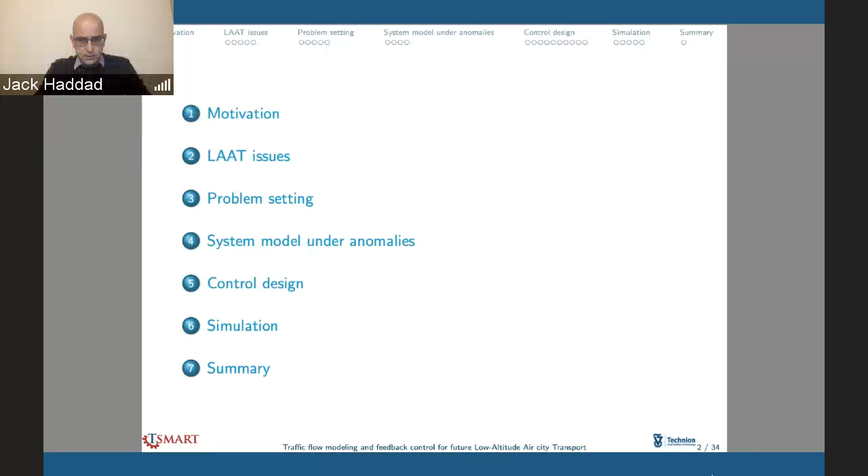So low altitude passenger and delivery aircraft are being developed as a new mode of urban transport. There are many companies involved in developing such vehicles, like Airbus and Volocopter in Europe, and Boeing, Uber, Tesla in the United States.

So the penetration of these low altitude passenger and delivery aircraft into the airspace cannot be prevented in the near future. We estimate something about 100,000 passenger drones that could be in service worldwide in 2050, and more, expecting more like millions of regular delivery drones in the airspace of cities in the future.

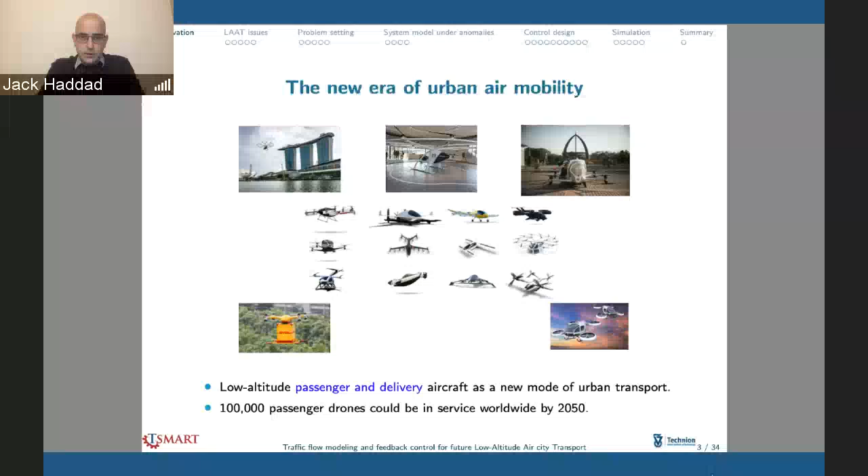So what will happen is this will give rise to a new urban air transport system, which we call LAAT, low altitude air transport systems. And similar to road transport systems, increasing the number of passenger and delivery aircraft will cause congestion. And once it causes congestion, it will also raise new air traffic control challenges.

Therefore, we think that we must first investigate the collective behavior of LAAT aircraft in cities and the ways of controlling LAAT systems. We believe that the MFD can facilitate and help in the modeling and control of large-scale LAAT.

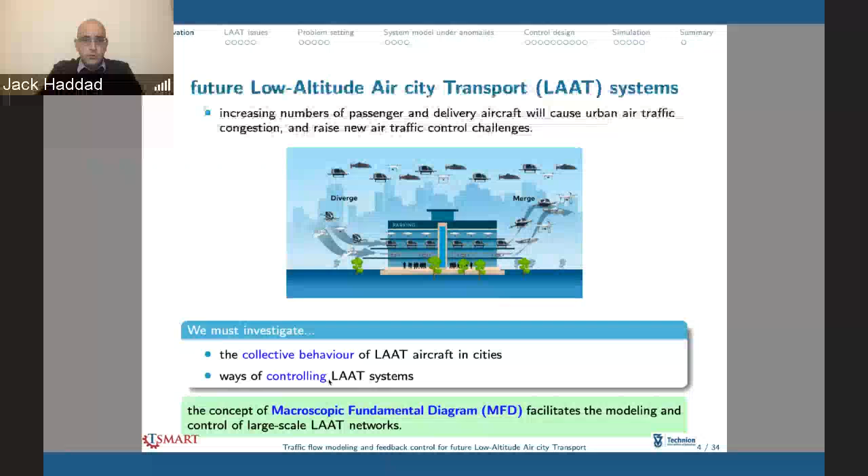So let's move to the LAAT issues that we need to handle. First, the current air transportation management schemes that exist are limited, and they are limited to conventional airplane operations. They cannot be used for LAAT systems.

They are based on centralized control structures, which means we have a human operator or controllers responsible to ensure the air traffic moves safely and efficiently without any collision. Such a control or management scheme implies rigid, individual trajectory-based operations with fixed routes, pre-planned or approved aircraft schedules, while ensuring conflict detection and resolution in the air.

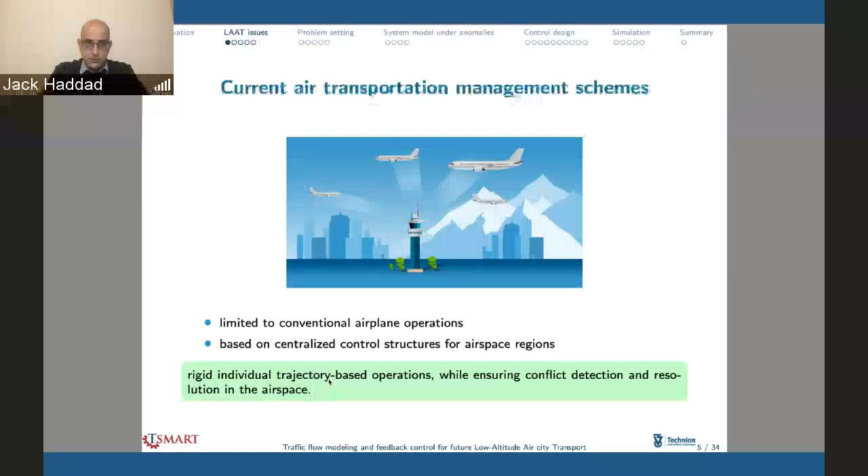Regarding the operation of the future system, in comparison with conventional airplanes, the operation of the future LAAT system is expected to be more flexible. For example, such a system will allow on-demand point-to-point urban travel or delivery with a higher total number of daily short trips, under a more complex urban environment with energy consumption constraints, in addition to noise and weather considerations that should be taken into account.

The LAAT aircraft are also expected to operate under congested traffic conditions. This happens because of the large number of passenger and delivery aircraft, and also because they will be traveling in a very limited allowed capacity.

In addition, we have a very unique dynamic property for the future aircraft, which is hovering. This is one of the key differences between drones and conventional aircraft. In congested regions, the hovering dynamics will introduce new interaction effects between aircraft, like a platoon of drones waiting to enter a parking area or any other building. So we need also to control such buildings.

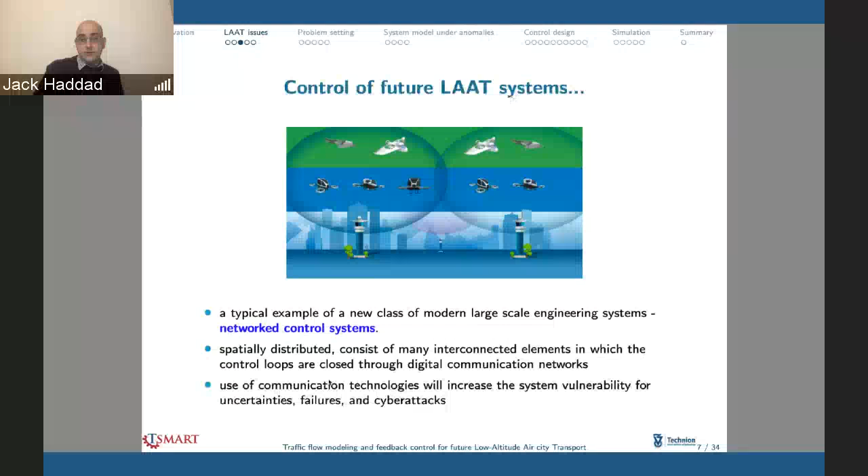My point here is that the large LAAT network should be robust to various anomalies in technical devices or network communication. This is a very crucial point, because first we will increase safety, and more importantly, increase community trust and acceptance of such systems in the future.

Given all these operation differences between conventional aircraft and LAAT aircraft, future aircraft cannot be managed by current aircraft management schemes, because they are not dedicated to this task. If we utilize such a scheme, this will decrease the traffic performance of the future LAAT system.

Therefore, inspired by urban road networks, we suggest addressing the future air congestion problem based on a new operational concept. So instead of looking at individual aircraft, flows of aircraft traffic should be controlled.

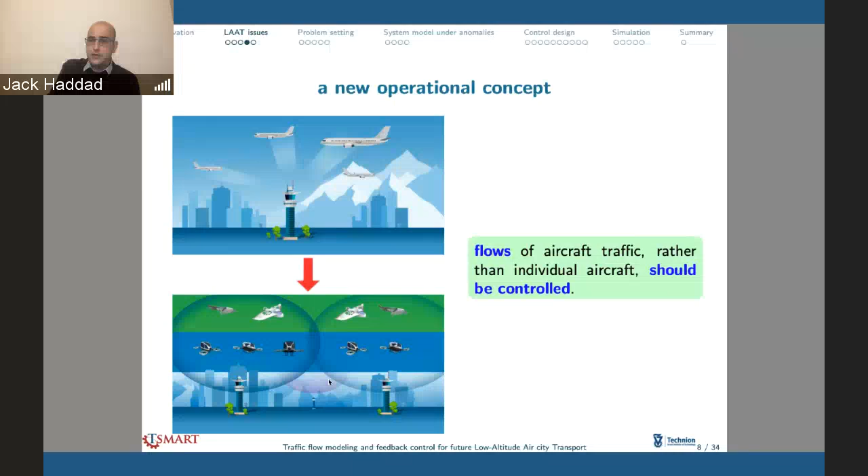So the solution approach, and this is the main important slide in this presentation, is to develop a traffic flow model and feedback control theory for LAAT systems. We do this in three steps. First, we need to establish the concept of MFD, which is now widely used for ground urban traffic modeling.

In the last decade, there were a lot of contributions for urban traffic networks using MFDs. Last week in this TFT webinar, we also had a work related to MFD.

Once we have this MFD relation, we need to develop an aggregate flow model with boundary control. We call it boundary control instead of perimeter control as in urban road networks, because it will be two-dimensional borders in the space.

So we need to introduce a new flow model for large-scale multi-layer air transport systems. Once we have the modeling in hand, we need to develop an effective design approach for this boundary adaptive feedback control, which would be robust to anomalies in technical devices and network communication itself.

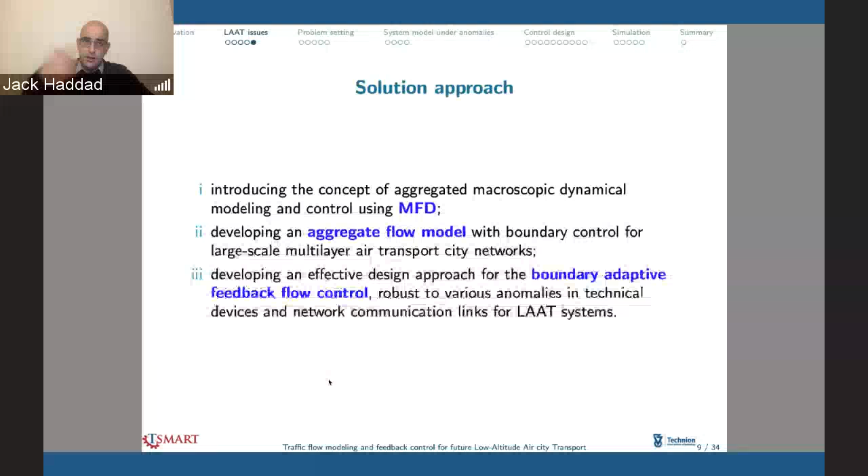Okay, so let's set up the problem. First, we conducted a very large, deep literature review on this topic, and we conclude two things: first, that urban traffic flow models for LAAT systems have not been fully explored, and second, that feedback control strategies considering LAAT systems have never been introduced.

What we saw in the literature is that there are very limited works introducing only elementary traffic-oriented models, either microscopic at the level of aircraft or macroscopic at the level of a link, related to LAAT systems. Here we show several of these. We focus on the last one, Xue and Do.

We take this microscopic model presented in this work just to model the microscopic behavior in order to construct things. I will not describe the whole model here, but the main flow characteristics are summarized in three items. This model considers an aircraft as a double integrator dynamic with some interactions. A full description can be found in this work, but the idea is simple.

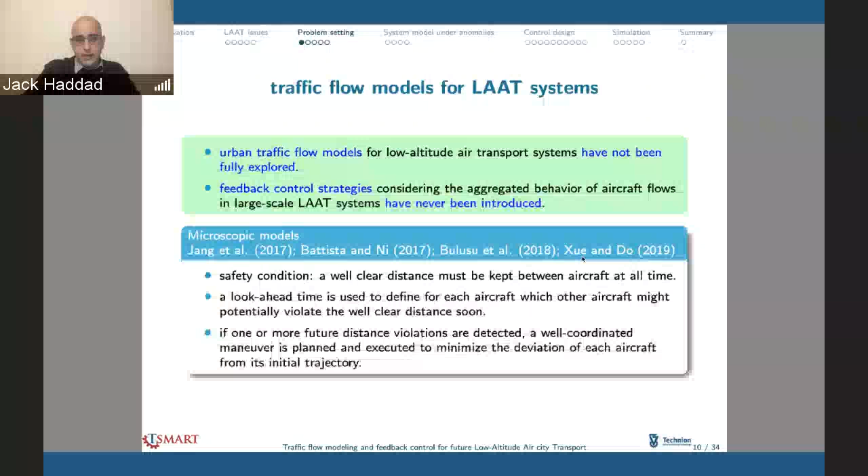This can be calculated using simple nonlinear integer programming, and this is what you see here in the figure. We show microscopic results for four aircraft trajectories traveling east to west, west to east, north to south, and south to north.

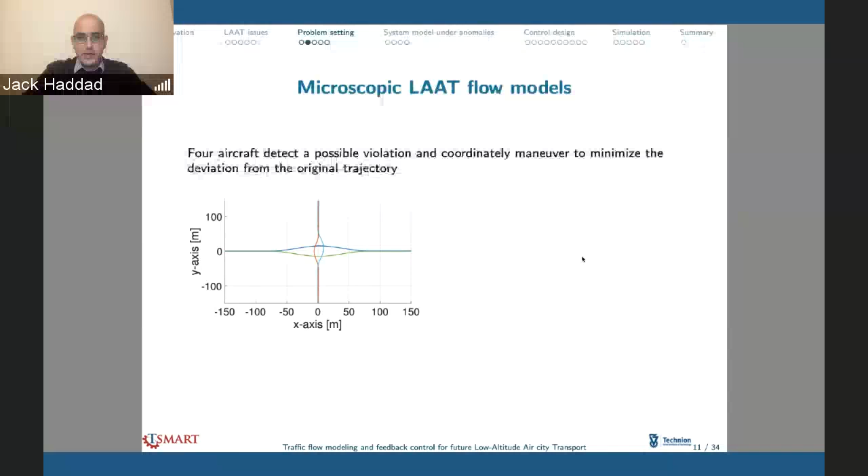And you can see that the 4 aircraft detect possible conflicts and violations, and therefore you see these changes and deviation from their original trajectory.

Here we present one of the case studies that we investigated in order to extract an MFD shape for the LAAT system. This includes a squared area where each aircraft starts from one edge and ends at a different edge. They start from O and end up at point X.

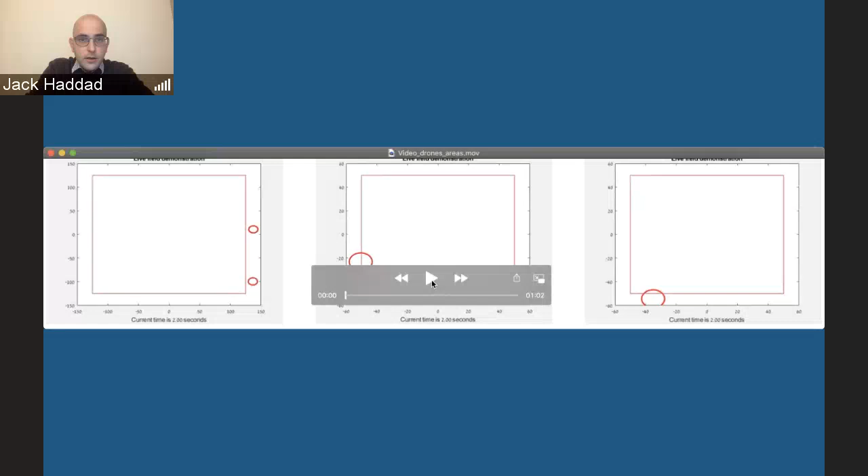I want to show you the simulation. I hope it will work. So let's share screen. Okay, I hope you see the simulation. If not, let me know. Raf, can you see it?

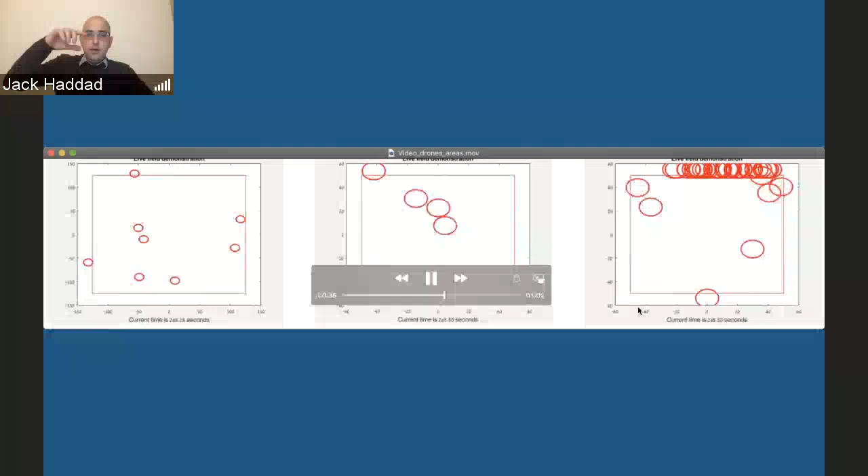So what you can see here is the space. Figure 1 and figure 2 have the same demand but less size. Then from 2 to 3, same size of area but more demand. As you can see, we move from uncongested condition to congested condition.

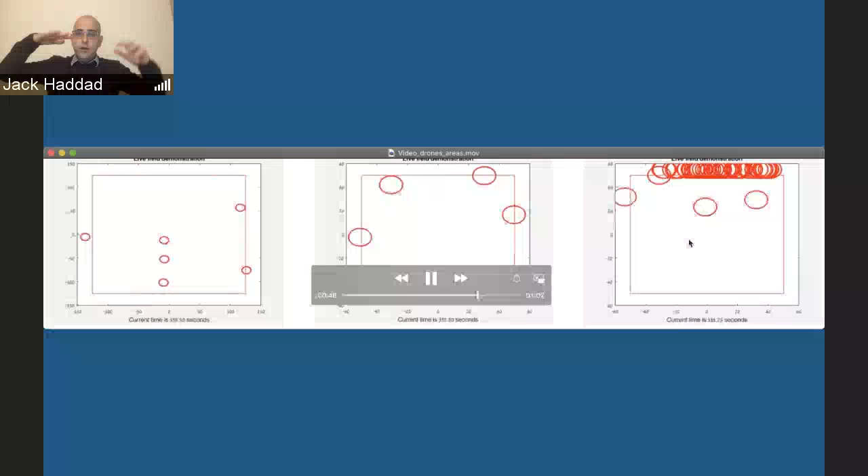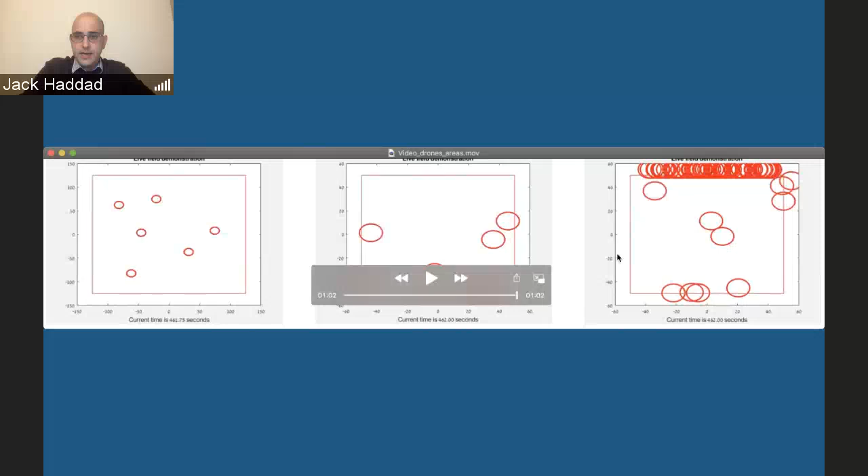As you can see in the congested condition, vehicles are hovering at the border. They cannot enter because it's very congested. Even recalculating the trajectory cannot help. They need to wait outside until they have some time to enter back into the frame and cross the area to their destination.

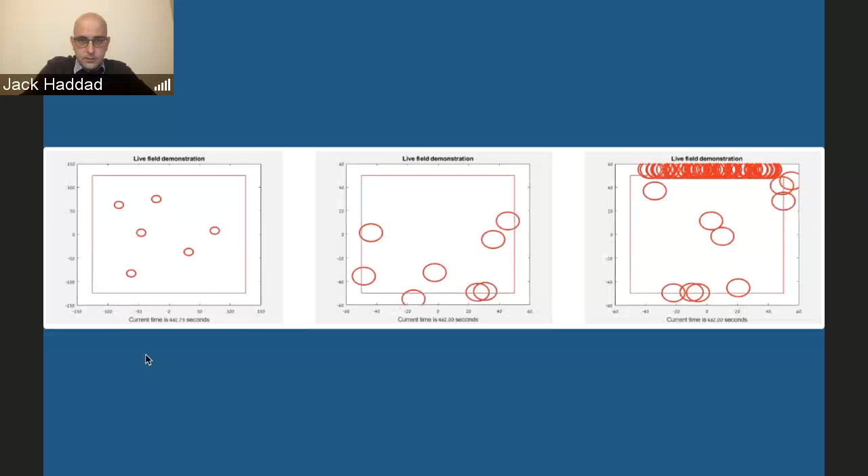Okay, so let's now see, we come back hopefully. Can you see my PDF file? Yes, okay perfect.

So once we show the simulation, now what we did, of course, is extract the MFD by doing simulation for different levels of flow, different profiles. Then we calculate the generalized Edie's definition, and we average those, and then we get this shape of MFD. This figure shows the MFD results, relating aircraft completion flow with the accumulation or number of aircraft in the urban airspace. So we have, let's say, an MFD - scattered, not scattered, this is another issue we'll discuss later.

Now we want to move forward because we need to set up the structural design of the airspace above the urban city. Only a few papers have recently proposed different airspace structure designs. These papers all follow the concept that the airspace can be similarly structured as a road network.

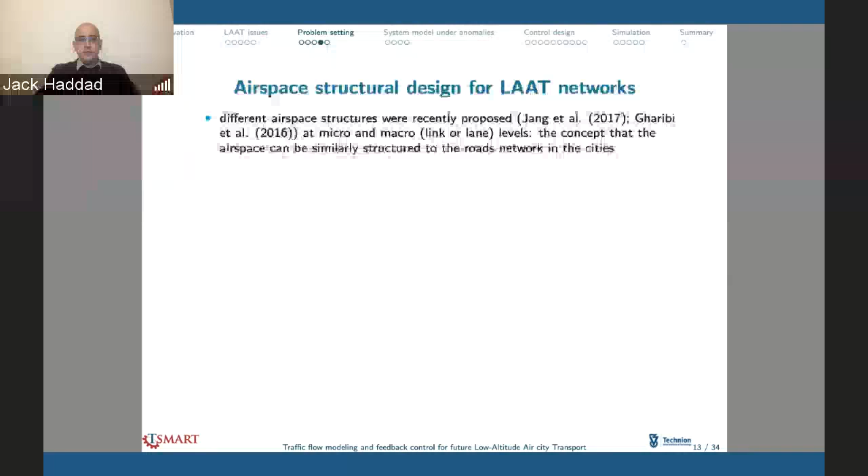So there are a few works that consider the airspace structure at the micro level and macro level, but we want to tackle the challenge at the network level. Therefore, we propose the following airspace structural design, which can take into account special elements of aggregate network flow modeling and future control measures at the network level.

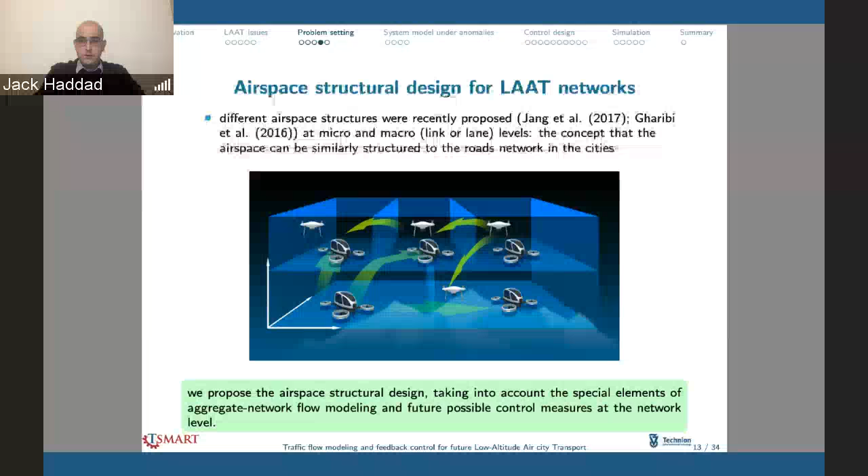So the airspace above the urban area is used for aircraft movement, and it is divided into multiple layers by altitude. Each layer, as you can see, is divided into virtual regions. So what we see here is that we want to build a structure we call a multi-layer structure, and it's a controlled volume.

And the airspace is decomposed again into L vertical layers. Each horizontal layer, similar to road infrastructure, is partitioned into virtual regions, where each virtual region has, as you can see, its own uncertain MFD.

We define aircraft traffic flow H as the number of aircraft traveling per time in the horizontal direction, while V is in the vertical direction. This means that, as you can see here, the drones can travel vertically from one layer to another, or horizontally from one region to another at the same layer.

So in order to control such flows, we also suggest what we call virtual distributing gateways. Gateways are something like a signalized intersection, if you want. So they are distributed on the plane here. We have 6 planes each region. They are distributed over the plane like gates, and there are M numbers of such gateways on the horizontal regions and G on the vertical movement.

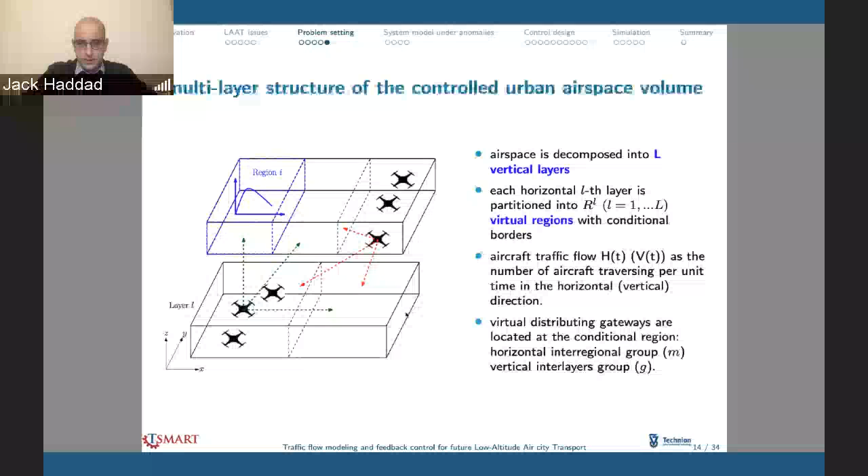Okay, so now we move to the system model, and we introduce a multi-layer urban LAAT system where the aircraft accumulation for region I at the Lth layer is given here. As you can see, it is partitioned into 3 parts. The first part, aircraft with internal destination. The second part, aircraft with destination to region J horizontally. And as you can see, J belongs to some set of regions that can be reachable directly from region I.

And we have the same for vertical layers P, where P belongs to some set of regions that are directly reachable from region I in vertical directions. As you can see in the equation, we have a third index. The first sum is summation over regions, and the second sum, the M and the G, is the index related to K and S. It is over the gateways, because in each plane we have different gateways.

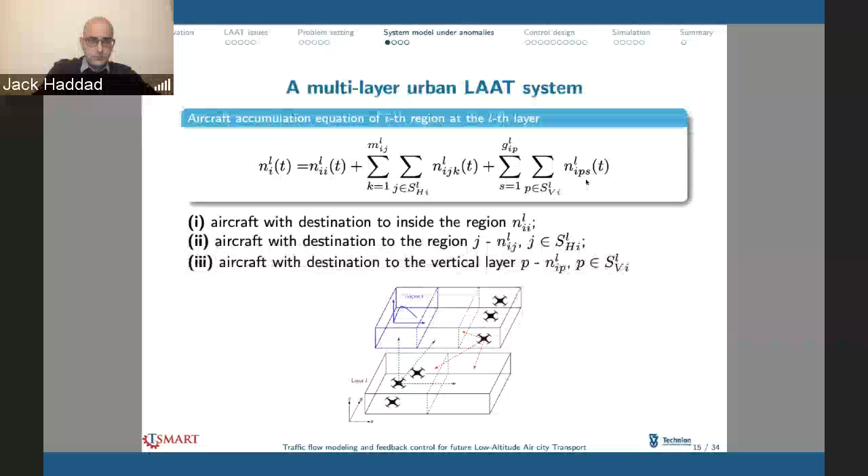And the aircraft conservation equation would be given here. So the change in the number of aircraft in a region I of layer L is equal to the difference between inflow and outflow, where the first term is actually the internal flow - in other words, a flow that is entering and finishing in the same region I.

And the last term is actually the uncontrolled traffic aircraft demand. We consider it as a disturbance in the system, while the other four terms are the controlled input and output transfer flow between interregional and interlayer gateways. Remember, H is for horizontal flows and V is for vertical flows. And again, as you can see here, we have also two summations.

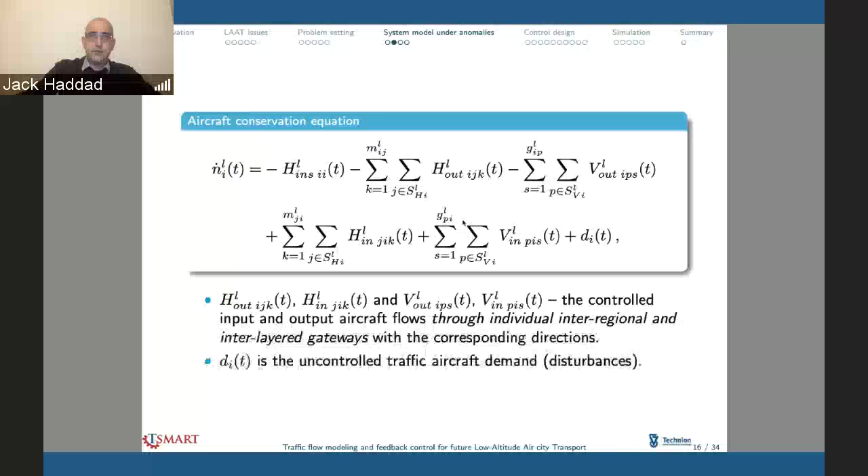Okay, so now we want to connect this with the control. So we take all these four elements and write them in a vector way. What you can see here, based on the MFD concept, we can distribute the flow - if you remember, in road networks, according to the destination decomposition factor. So the total flow is distributed between different regions according to the ratio of accumulation.

But here, what we wanted - we have the MFDs, and we have these weighting factors, which are very general, general nonlinear forms. It can be constant or time varying. We wanted to keep it very general. And here the U is boundary controls in each region, specific to the gateways. This can also be rewritten as a vector, with big U, U R and U V.

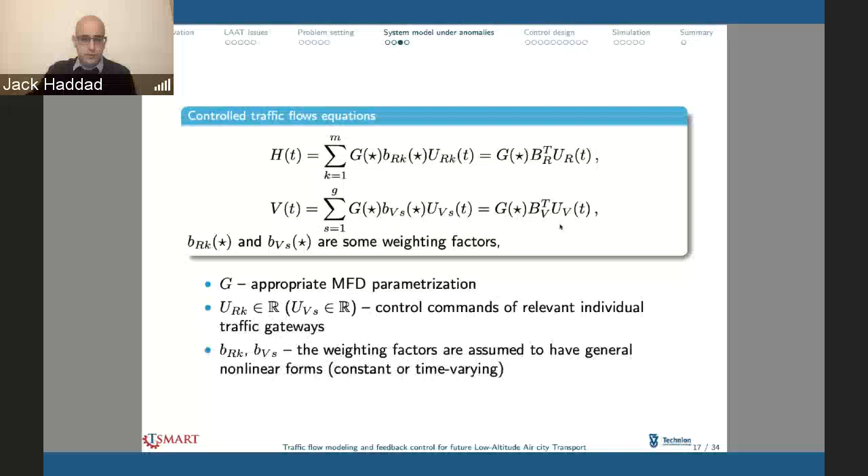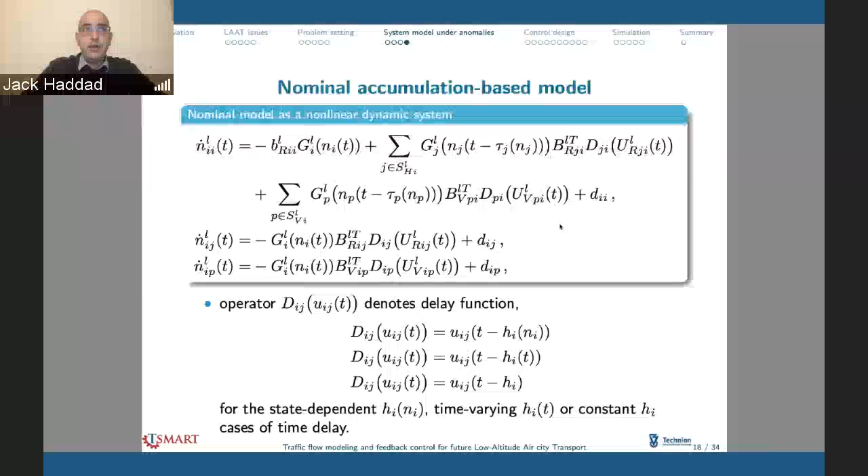So finally, once we have this, we can write or rewrite the nominal accumulation-based model, and this is a general nonlinear model operating in the nominal mode. What do you mean by nominal mode? Nominal mode is where we consider a nominal MFD without disturbance, without uncertainty in the MFD.

Meanwhile, the model includes, as we said, a set of three equations according to the different destinations - this is II, IJ, and IP, as I described earlier. But the nice thing is that we include here now - look at the U - now we have some operator D as a function of U, okay?

And this D denotes a delay function. So there is a delay in the input, and this can be state dependent, or delay time varying, or constant. I kept it as general as it can be, because this delay is a very powerful tool in order to introduce more enhanced dynamics for the LAAT systems. So we can model different aspects, different issues in the LAAT system by introducing delay.

So there's also future or ongoing research on how we define this - for example, delay as a function of the accumulation. There are several works that I did with the regular MFD with input delay that we want to share, to see if, in terms of physical meaning, it holds for the LAAT system.

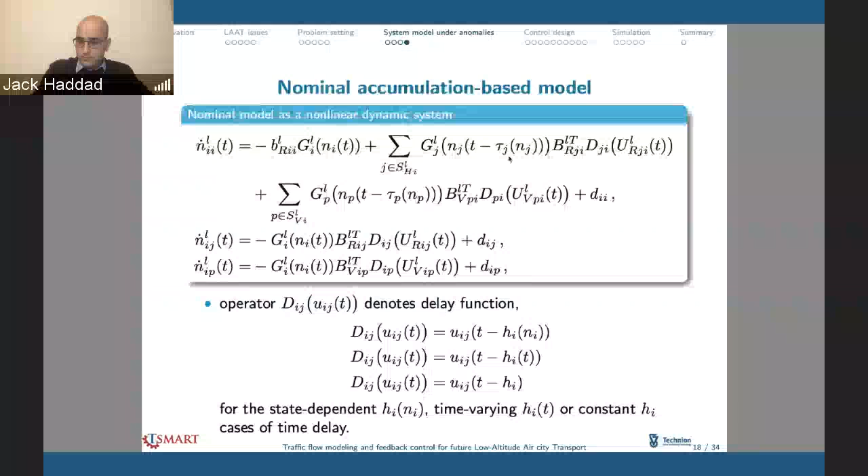Another fundamental feature that we present here in the modeling is that we add delays, as you can see here, in the states, or in the other interconnection states. So we consider here a region I, but for N accumulation J and N accumulation P, for the other interconnection regions, we introduce some delays, and this will be described in the next slide - related to, for example, some errors, failures, or cyber attacks.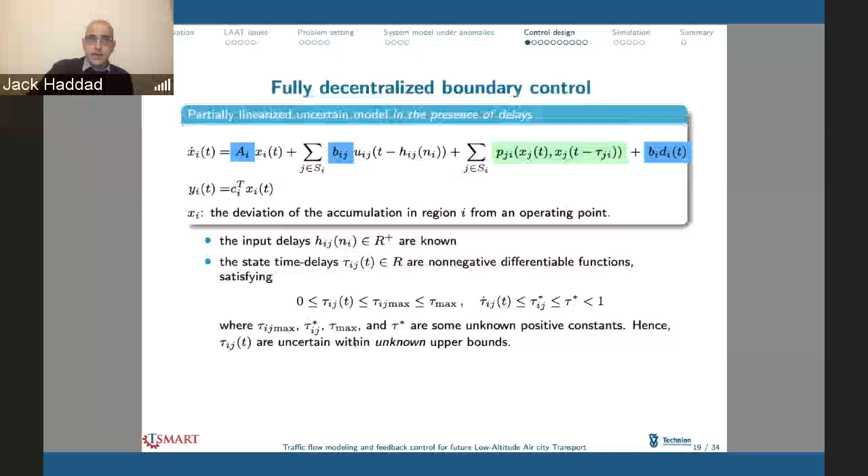And then what we have here, input delays. We assume that they are known in the control. We also have state delays, tau, that we assume are bounded by tau max. So these delays we don't know in advance, they are uncertain, but they are bounded, and even these bounds we don't know in advance. So these are the two assumptions we make: a bound on the delay, and also that its derivative over time is less than some value. This will help us in the theory.

Now regarding P, what you see in green. P brings together several items and nonlinear interconnections. The nonlinear interconnections, nonlinear offset, are introduced because we might choose a non-equilibrium operating point, and there are some high order terms when we do the linearization. So all these will be integrated into this term P, and most importantly, it will also take into account the potential unreliable communication between regions—for example, if we have denial of service because of a cyber attack and so on. So we add the delay in this term here, tau, as you can see.

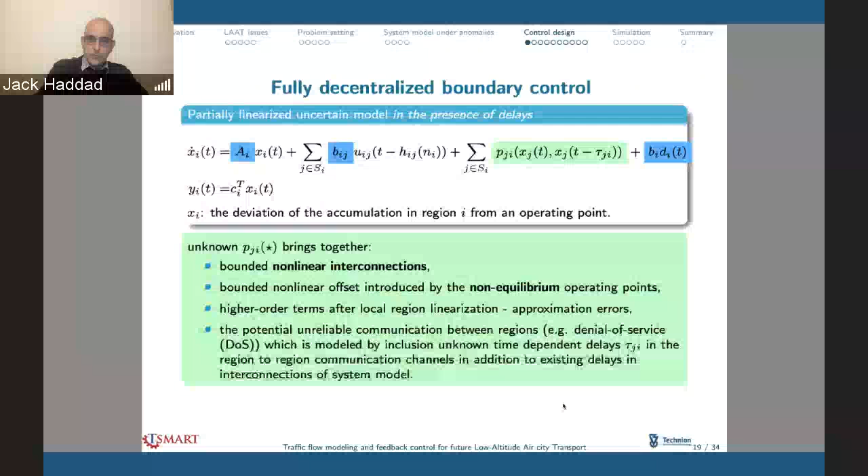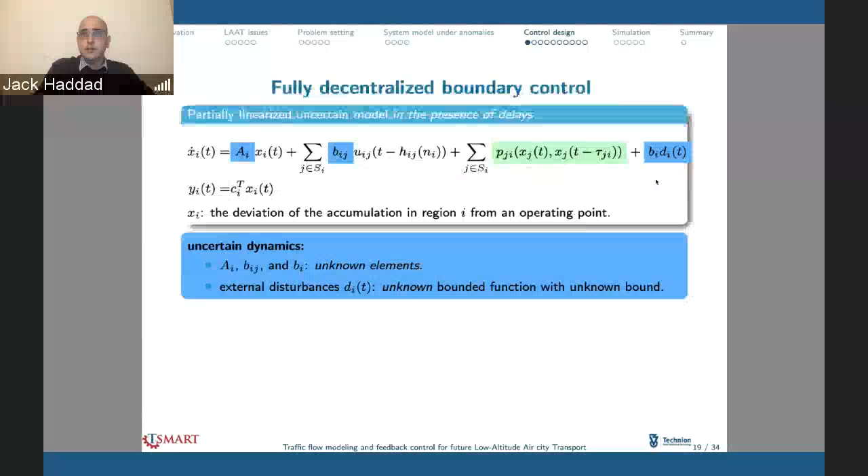This is the uncertain dynamics I mentioned before. So all these matrices have unknown elements, and the external, uncontrolled flow, for example, is also unknown, but it is bounded—the bound is unknown, and the value is not known.

So how do we design this? We follow what we call the model reference adaptive control approach to design the decentralized boundary controllers. There is a lot of literature on MRAC, model reference adaptive control. I'll just explain here the main idea of the approach in simple words.

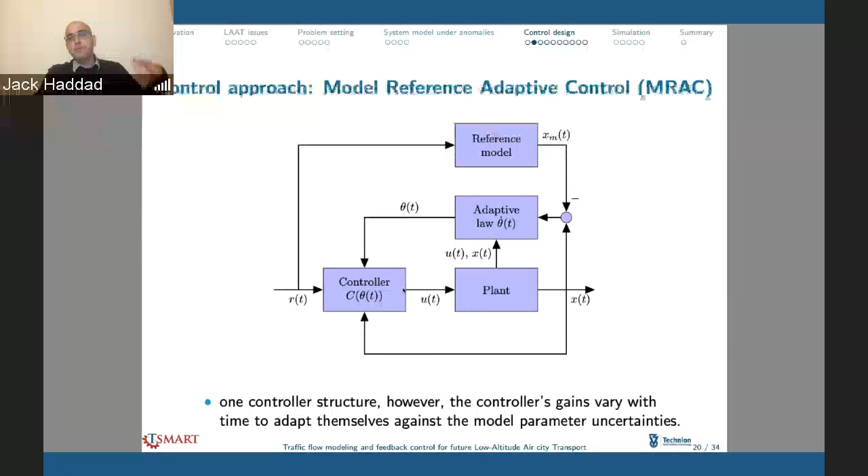So as you can see here, the scheme assumes that we have one control structure depending on some parameter theta, but these gains can vary over time in order to adapt to the situation, or adapt to the uncertainties in the parameters or other issues related to, for example, cyber attacks. So there is a block which we call adaptive laws that we need to suggest, in order to see how these gains change over time, right?

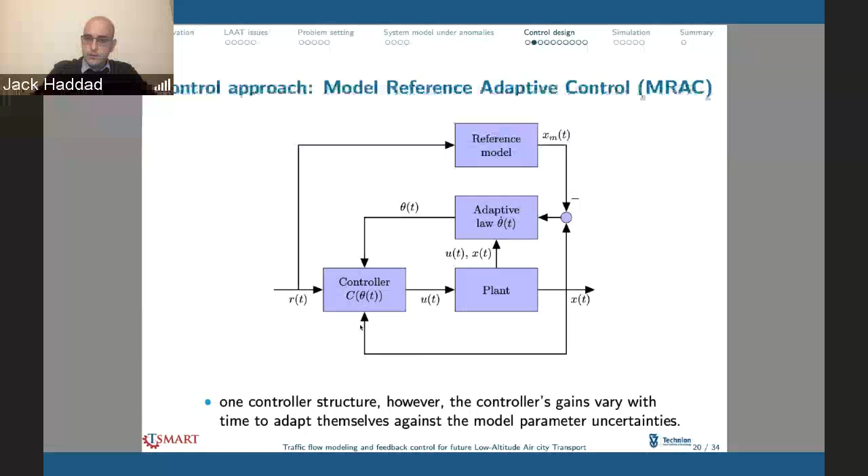And in order to do this, we get help from what we call a reference model. So we introduce some trajectory, some model that produces trajectories that we need to track. This will help us derive the adaptive law such that the controller brings the state to the trajectory that we want.

So the question is, can we use a control structure and adaptive law algorithms from the literature? As far as I know, no—we need to develop our own control structure and our own adaptive laws for the current problem. So when we use MRAC with non-constant input delays, especially in a decentralized control structure, we need to introduce something new in the theory to handle it.

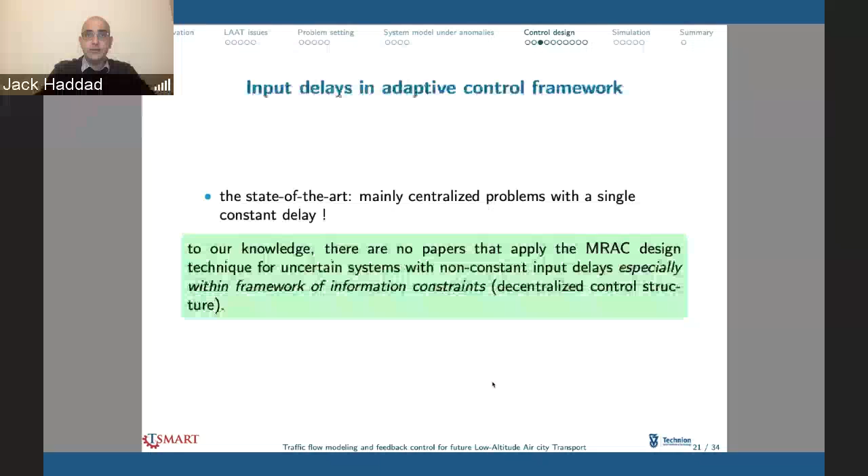And these instances we call events, and these events occur when, for example, the control variables deviate too much from their required or expected values. So to identify this deviation, an event detector is included in the control loop. The event detector monitors the control continuously, checks it, and compares it with a pre-specified logic rule that we suggest. And if it is violated, then we will apply the control step.

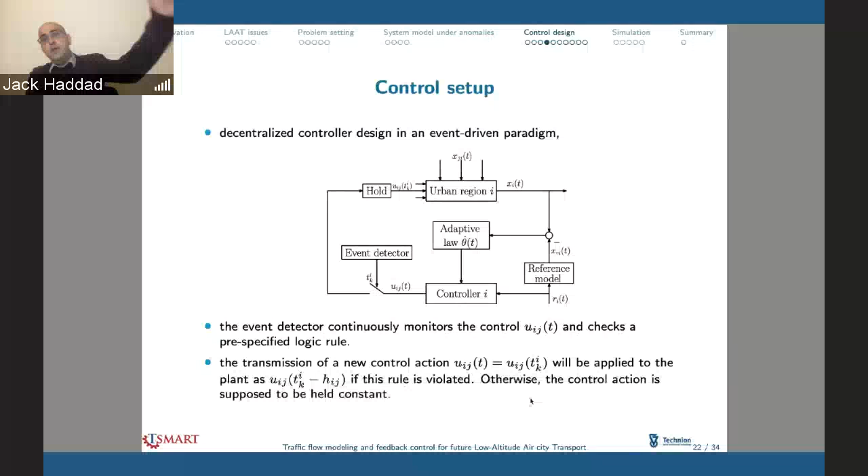The key point here is that using the event-driven paradigm or framework will help us in designing the algorithm. The idea of the design is simple: we have some difficulties in adaptive control when we have delays, which is to predict the plant state given the delay in the near future.

But to overcome this difficulty, we can reformulate the model we presented into an equivalent plant for design purposes while extracting these delay terms. So what we do first is introduce non-delay control inputs, then relocate the delayed control inputs as components into some auxiliary signals, built with the help of the event detector rule that we presented.

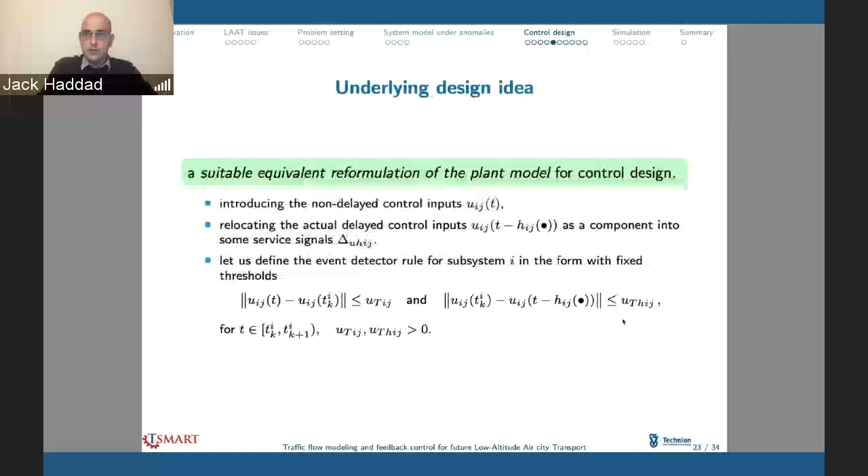We can define different event detector rules. We define this one here, which is the difference between the continuous and the discrete one, and the discrete one with the delay should be less than, the norm should be less than, some pre-specified value. So the idea is simple.

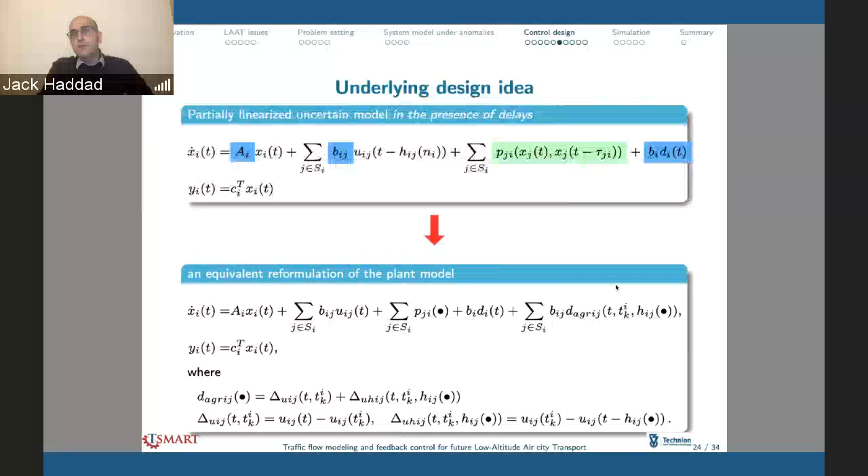We start with the model that we presented, and now we reformulate it as the bottom model. As you can see, we get rid of the delay in the input here, and by introducing some new auxiliary signals from the event detector, this new signal will be moved to the right-hand side and considered as a disturbance.

So this is again the new model, and this is the observation. As I emphasized, this will be treated as an external measurable disturbance, and this is important because it's a measurable disturbance that can be measured.

Similarly, we can deal with plant disturbance. The nice thing is that we pull the input delay out of the control flow, and we have what we call the input-delay-free case of a control system. For this, we have various procedures for control design.

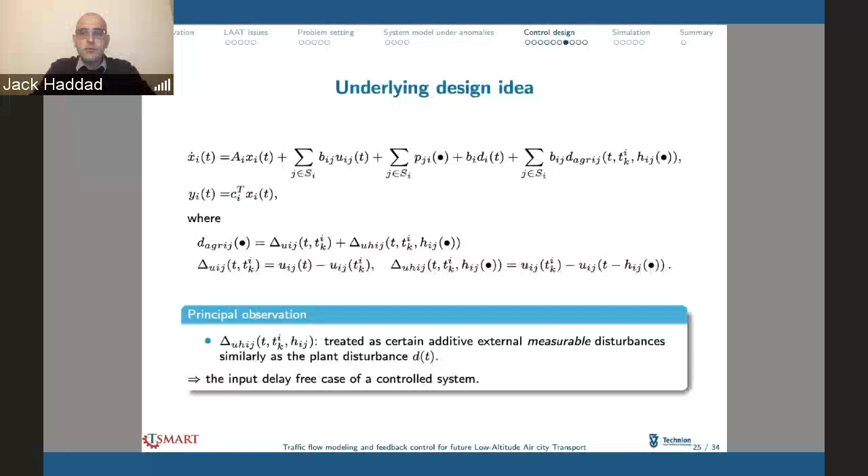Now we can design the control. The control objective is to design feedback tracking controllers that can only function with local online information, according to some information from the specific region I. But the closed system should be stable, and the states of the region of accumulation should track some reference model that we present here.

This reference model is described as a linear state dynamics, where for each region I, there is a state vector, reference input, and some constant matrices. This is very general—it can be any model to produce any trajectory, but it can also produce a constant trajectory.

For example, in typical MFD, when we do perimeter control, we regulate around some specific points, so this can be constant. If you want tracking, you just suggest some tracking formula, for example to minimize noise. You introduce this model, plug it in, and the idea is to track the output according to this reference.

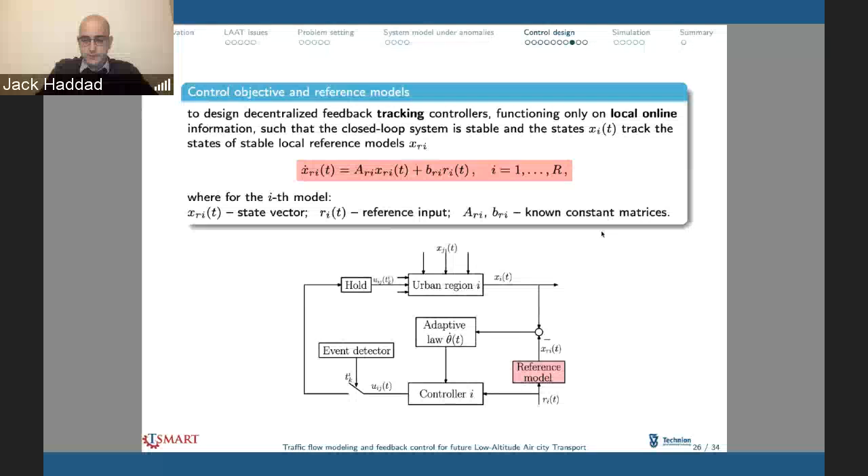This is the parameter adaptive rule that we suggested. The adaptation is a function of Z, and Z is a function of omega. You'll notice that omega is a feedback signal from the reference state, the input of the reference that we have, and also E, which is the error.

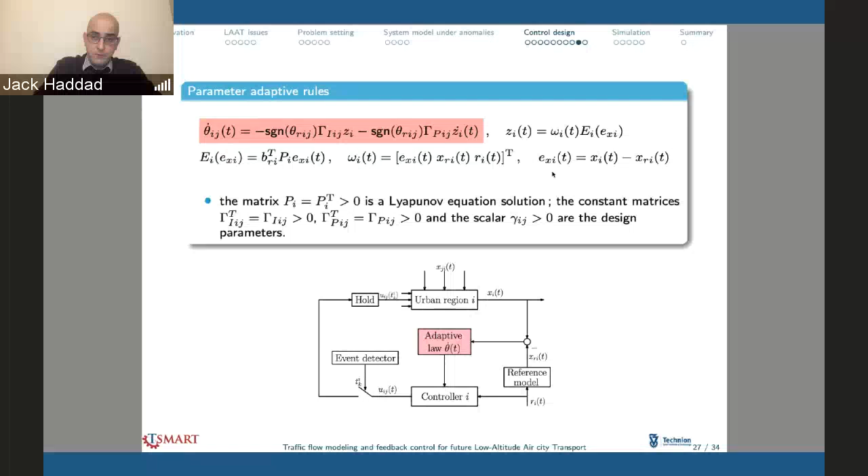This is what we call the tracking error equation, between the current real state of the system and the reference state according to the reference model. Actually, this tracking error equation helps us prove stability, and this is found in the paper.

So finally, the controller that we suggest, each boundary control for each region, has two parts. These two parts are presented here.

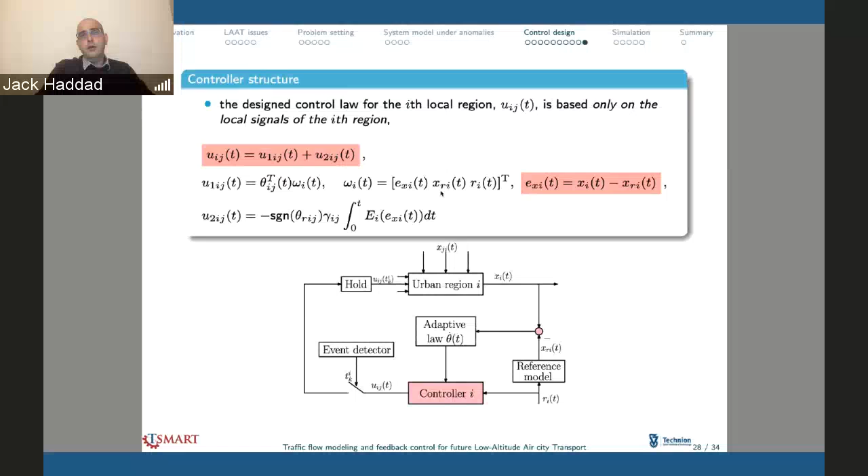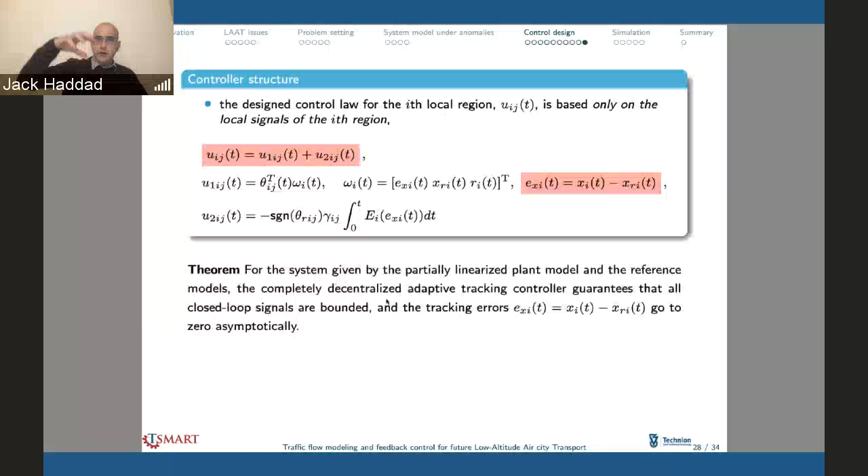Once you implement it, it's a function of omega, which is a feedback of the error, the reference state and input. Once we do it, we get this theorem: for the system given by the partially linearized model and the reference model we suggest, the decentralized adaptive control with this structure and the adaptive rules, all closed loop signals will be bounded and the tracking error will go to 0. So we reach our goal.

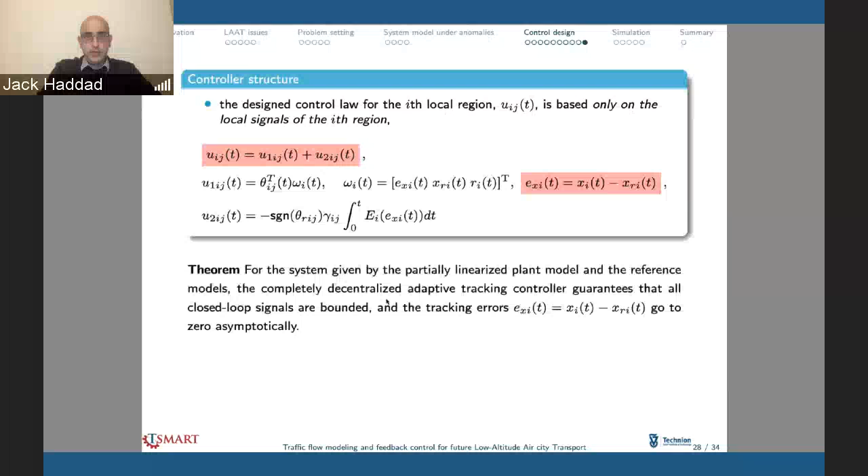Let's make it short for the simulation. This is the simulation results. We have 2 layers, 3 regions, 2 MFDs in the lower layer, and 1 MFD in the higher level. As you can see, we have a flow that can travel vertically, horizontally, internally, and so on, all options.

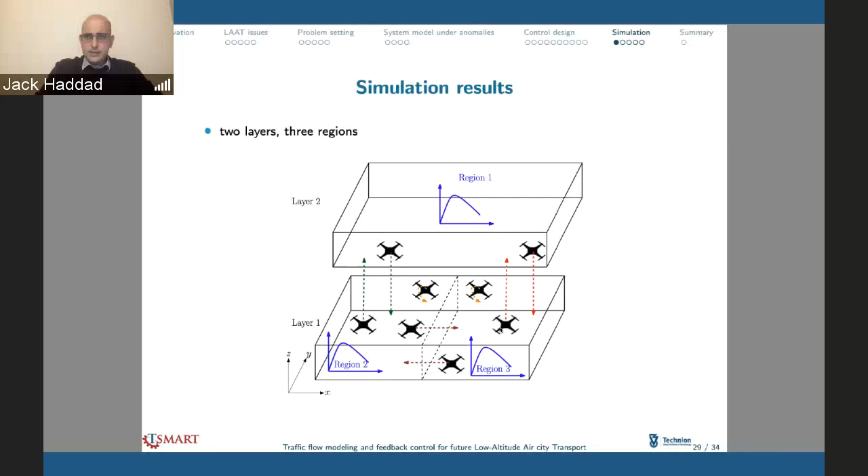We suggest an MFD for each region. We assume that each region, each virtual region, has an MFD, and these figures show nominal scaled MFDs. We also have some disturbance, but it's important to emphasize that the disturbance is assumed unknown for the controller. We don't know it in advance.

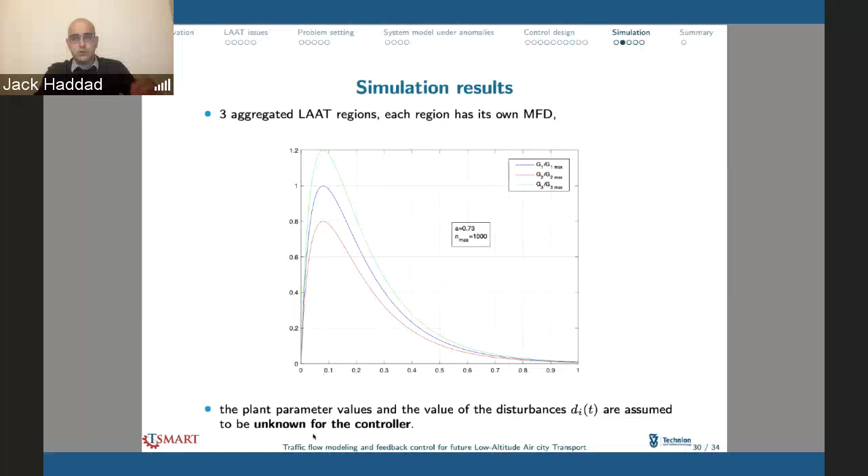What we show in the results of the simulation is the distributed adaptive boundary control for this two-layer system with three regions. So what we see here: the error, the disturbance, the control from region 1 to region 2 and from region 1 to region 3. Probably this is the vertical one, that one is the horizontal one. This is the first set of 4 figures, and this is another set of similar figures but with different threshold parameter values in the detector's rule.

As you can see, the error goes to 0. We assume a simple case of constant accumulation to track something near the optimum. We have some delay, we have some disturbance again, some jump, but it is not known for the controller. But the controller, as you can see here, it's like a stairs function. So we have the continuous value that is calculated, and we have the stair ones, which is operated by an event trigger paradigm.

This red one is what is implemented to reality. This one is calculated in the back of the controller, how you say it. They calculate it all the time, but they don't implement it. They implement just the red one if you pass the threshold or violate the detector that we mentioned earlier.

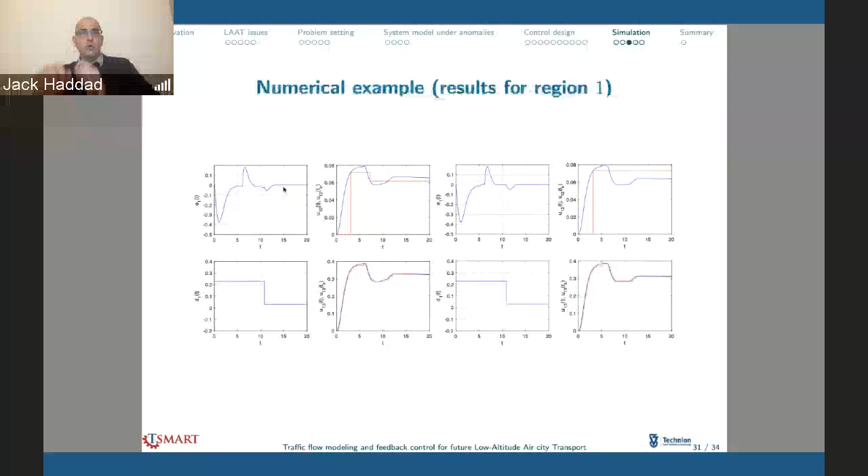You can see this for different thresholds. For example, here we have one implementation, second step, two stairs, two times we send to the plant. Here, because we change the threshold, we just send it once. With these given rules and thresholds, we can still succeed in bringing the error to 0. So if we have some initial accumulation, we bring it to the reference and the error will go to 0. So we reach our goals.

This is the same for region 2, and this is the same for region 3. And I will keep time for questions.

To summarize, this paper constitutes only the first, let's say primary, steps towards theory and practice for both aggregate flow modeling and adaptive feedback control for LAAT systems. We developed the model, which we call multi-region, multi-layer aggregate model based on the MFD. After this, we design a decentralized boundary control for each virtual region with an event-driven paradigm framework, which is also robust against different uncertainty with non-constant input delays.

With this, I finish my presentation. Thank you, and I'm happy to answer any questions if you have.

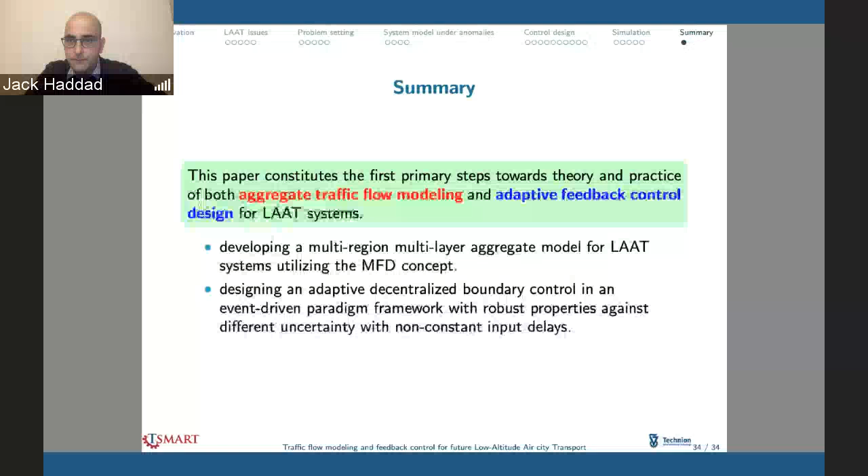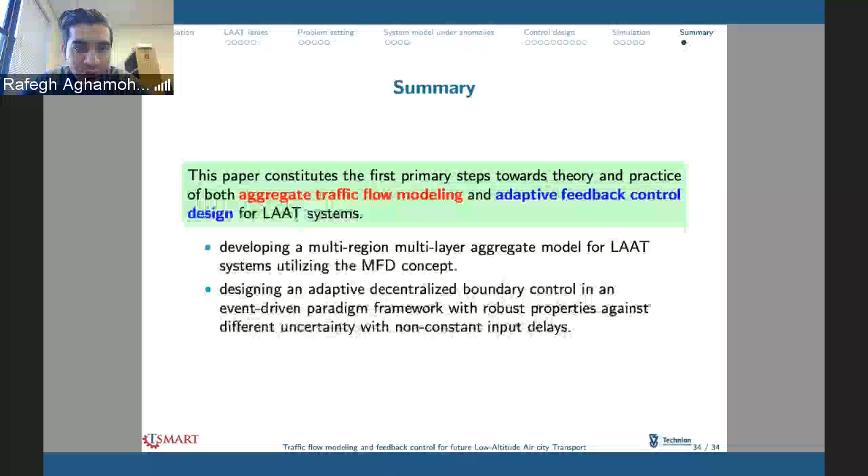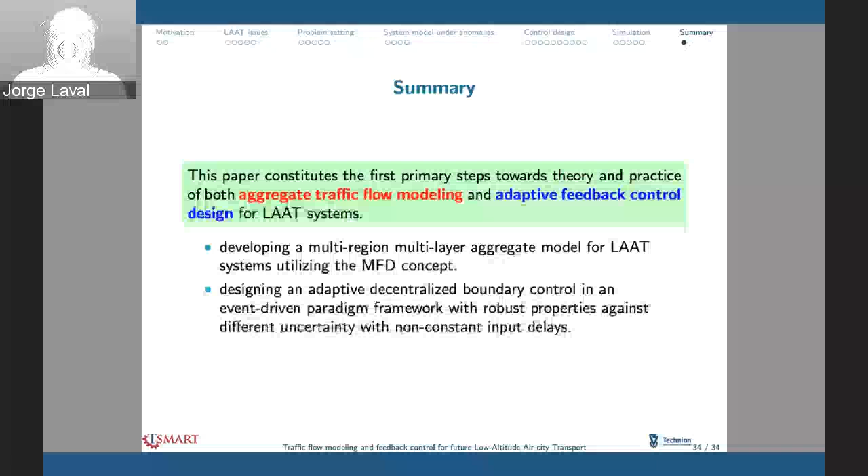I would like to ask, so do we know anything about the shape of the MFD? Can I see you? I prefer to see your face rather than to see. Okay. Yes. Do we know anything about the shape of the MFD and how it compares to regular traffic?

Look, the shape of MFD is very interesting. I cannot say that I fully investigated the shapes of MFD. We just started. Nobody's done this, right? No, actually there are some works in 2018. I can see it in the paper. If it's interesting, I can tell you the exact reference. But they didn't call it MFD. They called it something like relation between throughput and inflow, and they show this relation corresponding to different headways, minimum headways that you can accept. They didn't call it MFD, but it is there.

I also heard some other researchers starting to do MFDs for air mobility, but this should be seriously investigated more. What I see here is only one scenario extracted from one microscopic model, but it should be investigated further. We need to go in different tracks: one, to investigate more MFD shapes, and the other, once we have the MFD, to use this framework for modeling and for control, which is the main focus of this.

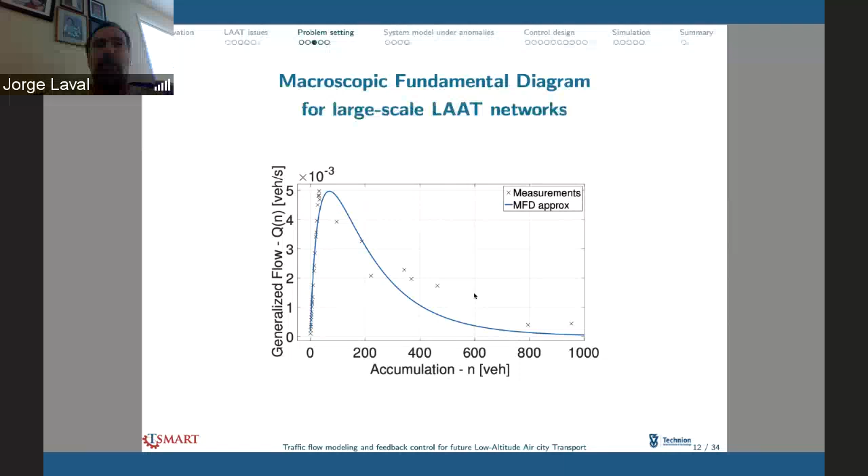It's not simulation, right? What do you mean real data? I don't have real data for aircraft, no. Oh, but when you say measurements, you mean from the simulation. Yeah, sorry, we need to change the term. You're right, this is typically according to this model and the simulation that you saw.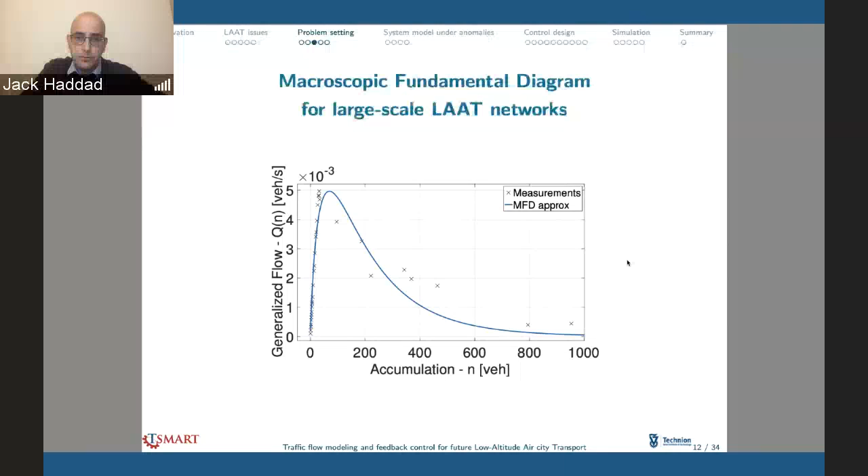There is actually no real data. One option is to do a lab that can test this with regular aircraft. I asked for funding for that, and it was denied. But it would be a nice idea if you could take some aircraft in a lab environment and do some MFD. I know NASA does a lot of work, with two mega projects, five years each, but they do microscopic modeling behavior, not macroscopic modeling behavior, so they don't use the microscopic modeling they develop to extract an MFD. One option is, once they finish developing it, it could be used as a better description for the microscopic behavior than the model I present, or you introduce a better one. Because there are issues that need to be tackled in the microscopic models introduced here, for example it's not clear what spacing you need to keep.

So let me ask you this: what about using the data for real aircraft going from city to city as a proxy for what you're trying to model? This is a very nice idea. We already did this in one of my papers with Kihan. We have a paper in Part B modeling an MFD shape for a relation between the number of airplanes waiting in the airport and the landing and take-off flow. Well, but that's different, right? But this is different, but we have the data.

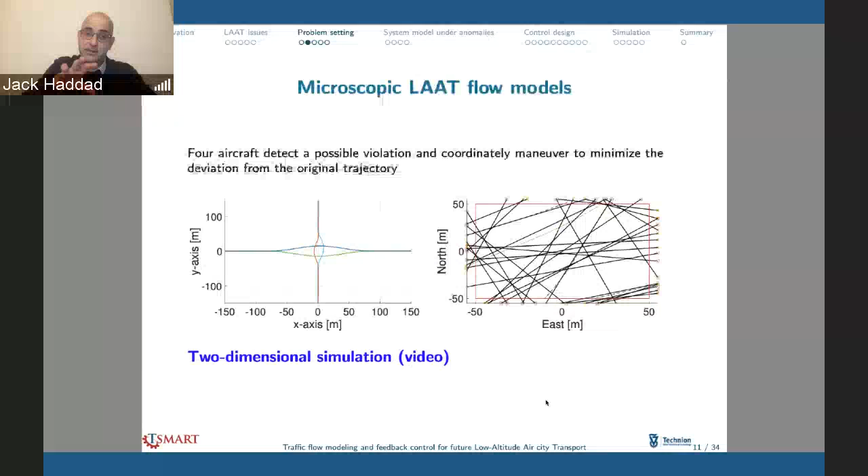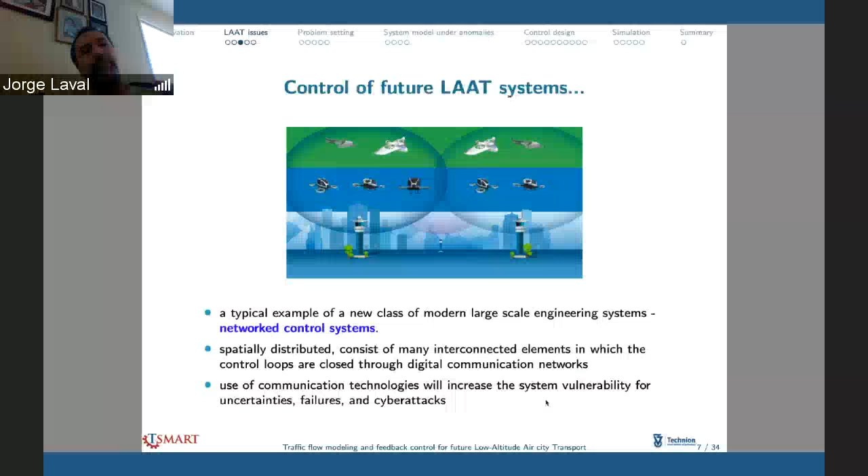But you don't need waiting times at airports or anything, it's just the airplanes in the air, right? That's our infrastructure now. I'm sure they have data on that. But even if you have data, there's a big problem, because there's a very important property written here: hovering. You don't have hovering for airplanes. But they do go in circles. Yes, but the circle is still very, very large and it's still moving, so the velocity differs. All I'm saying is you don't have data, but there's data you could use now, with some caveats obviously. Yeah, this is a nice idea, so it might be worthwhile.

All right, let's see if the audience is awake. It's morning in your place, right? Yeah. I guess they're not awake. All right.

Thank you, Jack, for this nice presentation, signaling the future of applications of MFD.